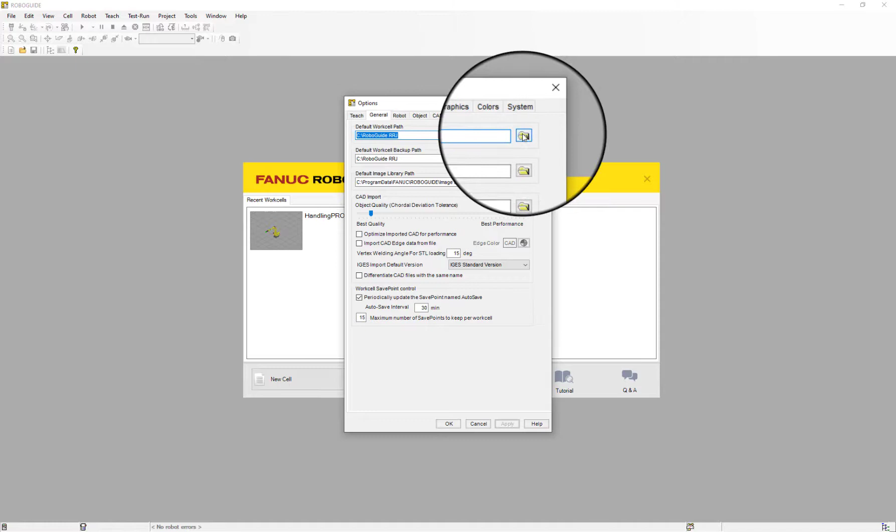Before doing anything, we're going to go to Tools, Options, the General tab, and yours will be mapped to a network drive, which it does not like. I'm going to click on this and select that RRJ folder I just created, and do that for the first two options here. I'm going into the C drive, looking for that folder I just created, RRJ RoboGuide, and I'm not going to touch, definitely do not touch, this default image library path. You're going to need these images that are in the RoboGuide application, so leave those alone or else you won't be able to finish the labs.

Click Apply and OK. Now we can start creating the new cell. New cell, and you get this wizard. Basically just follow along with the steps I'm going to call out here. There are 9 steps, and we'll build out the cell.

So Handling Pro is what we want to select. That's the default. You'll just call it by default Handling Pro 1. Go next.

Create a new robot with a default Handling Pro configuration. Yes. Here we want to build this out with the same controller that we have in the robots in the room, in the cells that you're working with.

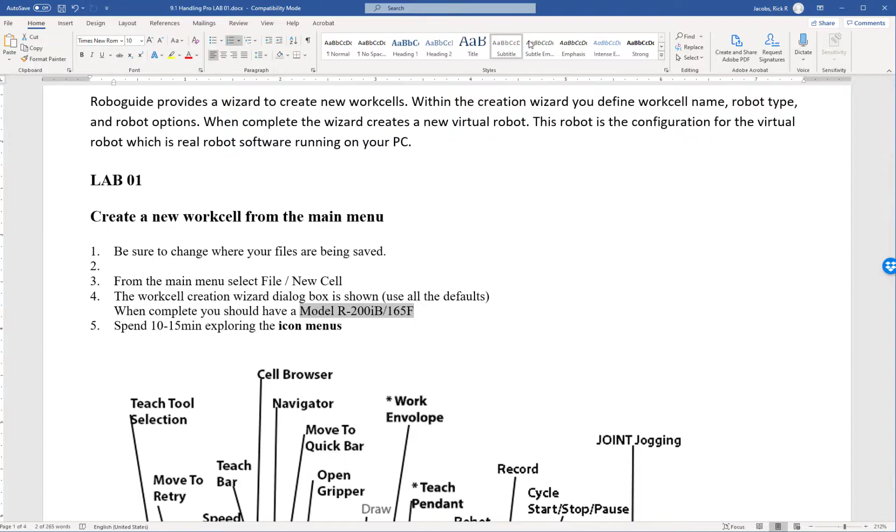You're going to look for this model, the R200iB/165F. If I come over here and look for it, it shouldn't be too far up. 200iB... 165F, I'm sorry, 2000iC/165F. Next, next, and next. Just all the defaults.

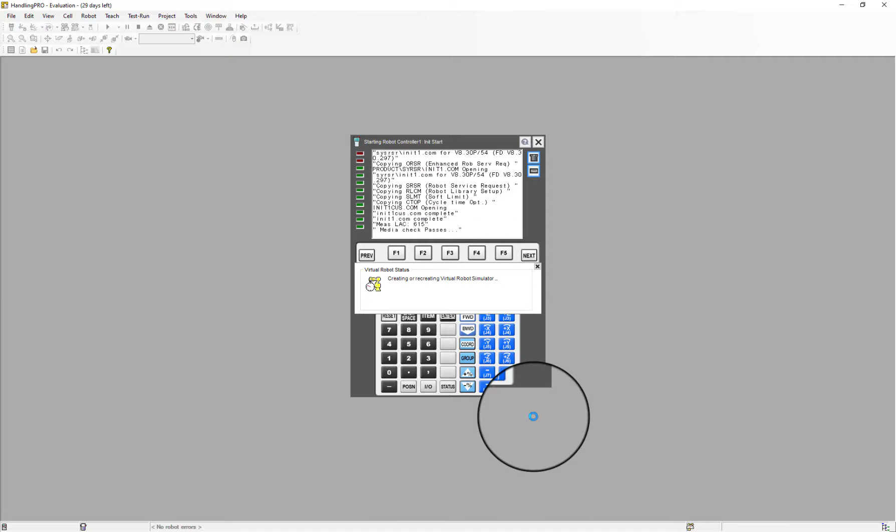And then finish. This will take a while, so you're just going to let this build and configure that cell. It's basically building all the configurations that you'd have in a normal robot cell, and this will take probably about a minute to 90 seconds.

When you first start up, you're going to see this handy little 3D World mouse commands. You can get rid of this because it gets annoying a little bit later, since you can't move it around.

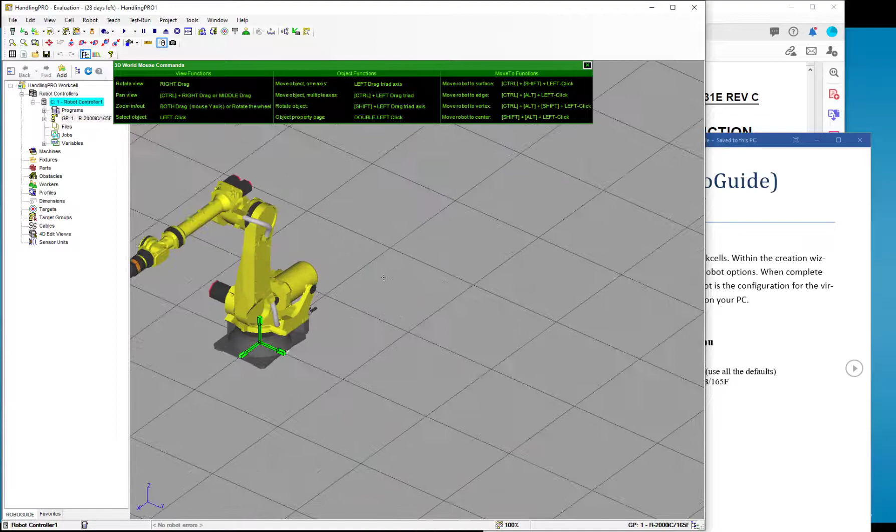But pay attention to right click and drag. Pan view is right drag or middle drag, which on the wheel of a mouse, if you click the middle wheel and hold it down, you can actually pan around like this. So right allows me to rotate 3-dimensionally.

Middle spin wheel allows me to click, and obviously the mouse wheel allows you to zoom in and out.

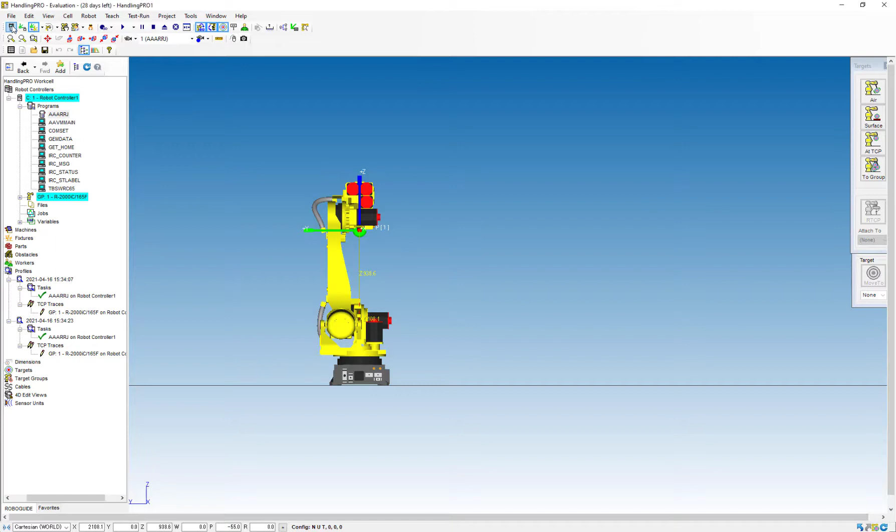Let me just go over some of the main menu items that you're going to be interested in. This key right here, or this button, allows you to turn your Teach Pendant on and off.

You can see here I've got it set up to actually run in a T2 configuration, and this follows everything you know about the Teach Pendant. The only thing that's really going to probably throw you off is that the Shift key is maintained. It's not just momentary.

Once you click it, it stays down, and that'll throw you off quite a bit. Just remember to unclick that when you want to do a lot of menuing or anything you would normally do. But for motion it's handy because you click it, and since you don't have two mice, you wouldn't be able to shift and hit forward otherwise, so it maintains so you can just click that.

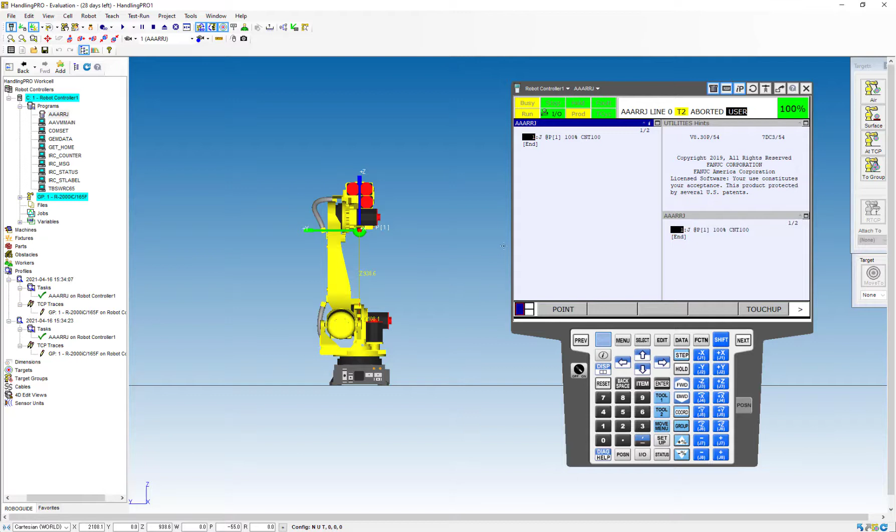If I look at the select key, I've created a program here with just one motion instruction in it. This is handy in case you start dragging your robot into a position and now wonder how to get back to a standard robot position. So what I did was create one motion instruction here, and then if I go to the position here... that shift key's getting me.

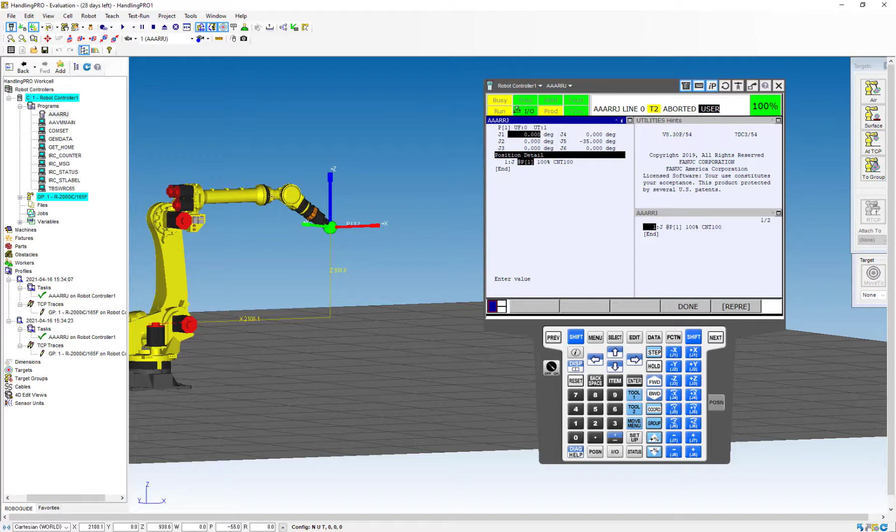If I go to position here and put in all zeros, just to not get into a singularity, I put a minus 35-degree angle on joint 5. So that's just set up, and I'll probably turn the teach pendant off right now so I can show you some of the other views.

This minus and plus zoom you can do with your mouse key a lot easier. Same with the whole pan - holding down the middle key is a lot easier.

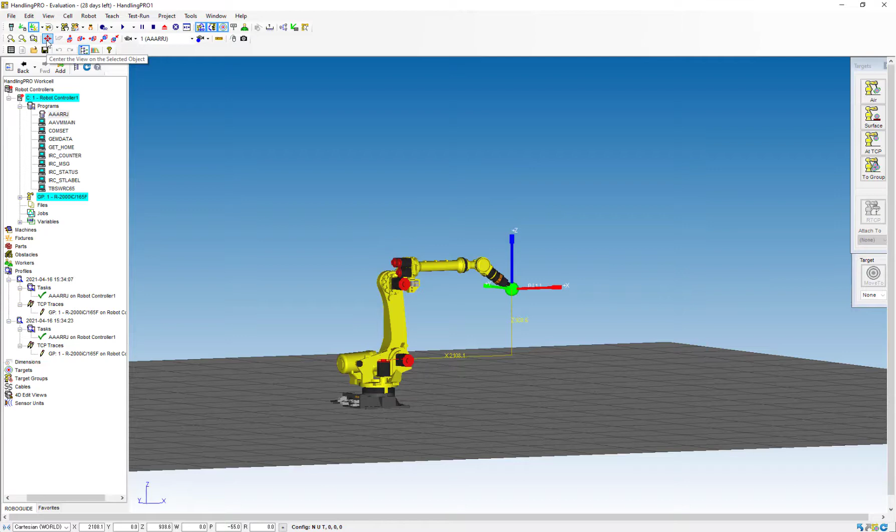But what is handy is centering my robot in the display, and also looking at top view, side view, opposite side view, and then looking straight on from the X. These are great for getting orientations that are just perpendicular to your coordinates.

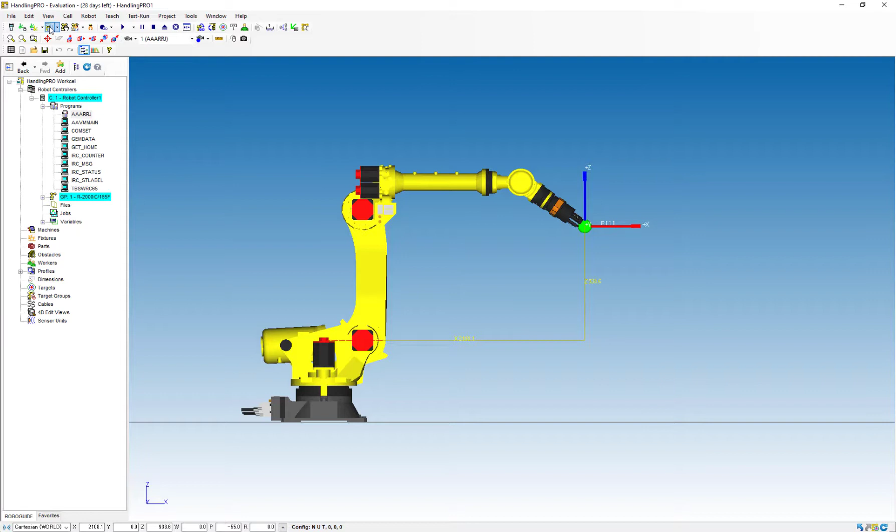If I roll over some of these keys here, you can see I can turn the work envelope on. This is basically the entire work envelope of where the robot can go.

I can also show the joint jog tools, and by grabbing these, it's pretty interesting because you can actually configure the robot or position the robot using joint mode, changing each axis by just clicking and dragging. So that's this tool right here, show or hide joint jog tool.

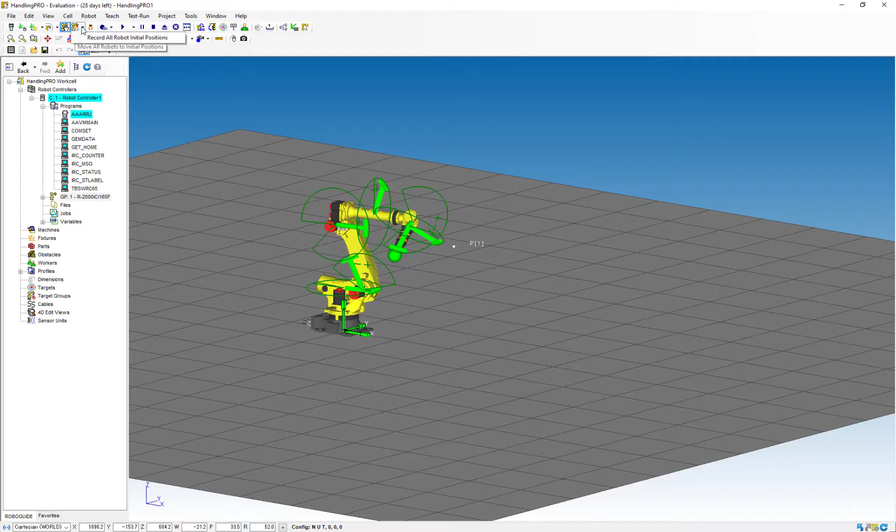The home position, you're not going to have that recorded at first. Neither will you have the hand tool, the opening and closing the hand. That'll come later. There are some functions here to make a movie and actually record what you're doing, and these are the shuttle or controls for making that movie.

The other handy tools you have here is that initial screen you saw with the mouse tools that will appear right here.

I should mention, down at the lower left-hand corner, you can see your different positions based in world right now, but I can click on this and go to joint to see where I'm at in joint at the current robot position. So those are some of the tools.

Just do yourself a favor and play around with some of these, and notice that a lot of these icons here are also available in the menus.

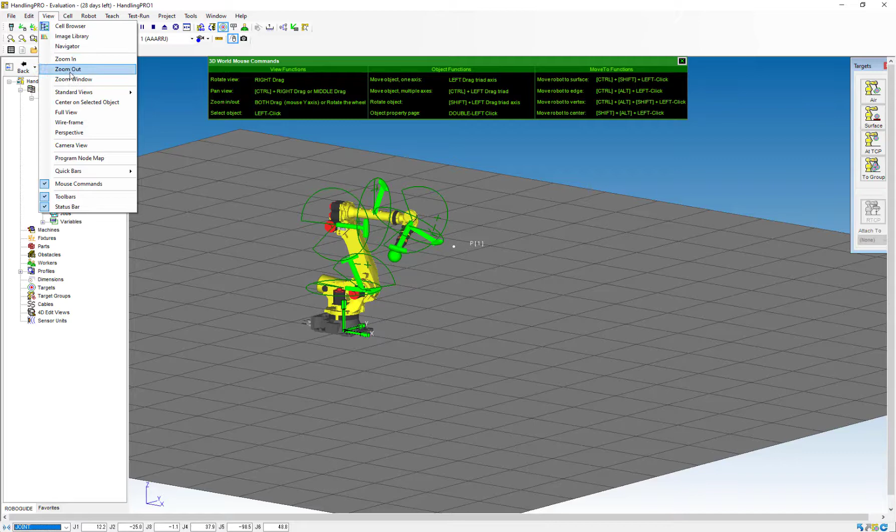So I can go in, zoom out, go to standard views here, which I actually like because it gives you the name of them right here, like right, Y - let me shut this off because that looks a little off. So yeah, a lot of the tools available in the icons here are also available in the menuing system.

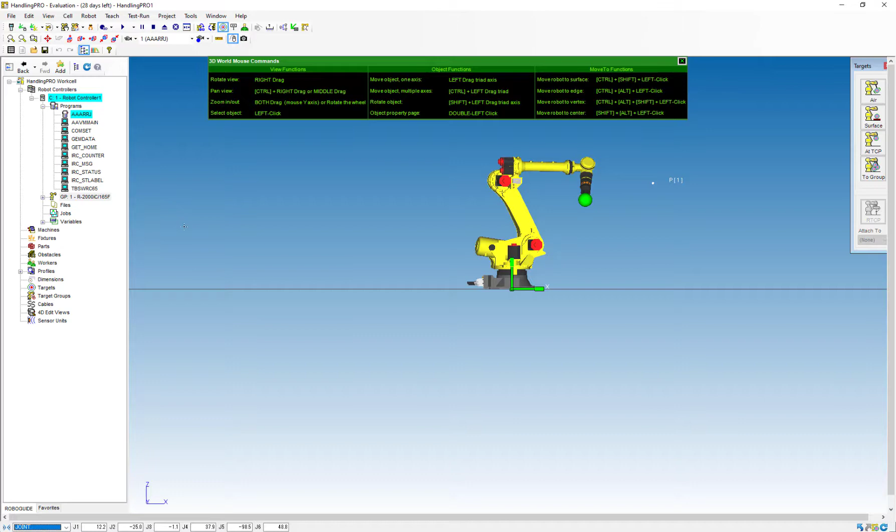So that's your introduction - take some time with it. There's also the tutorial if you want to go through it. It's a handy tool here prior to going on to the next lab in HandlingPRO.